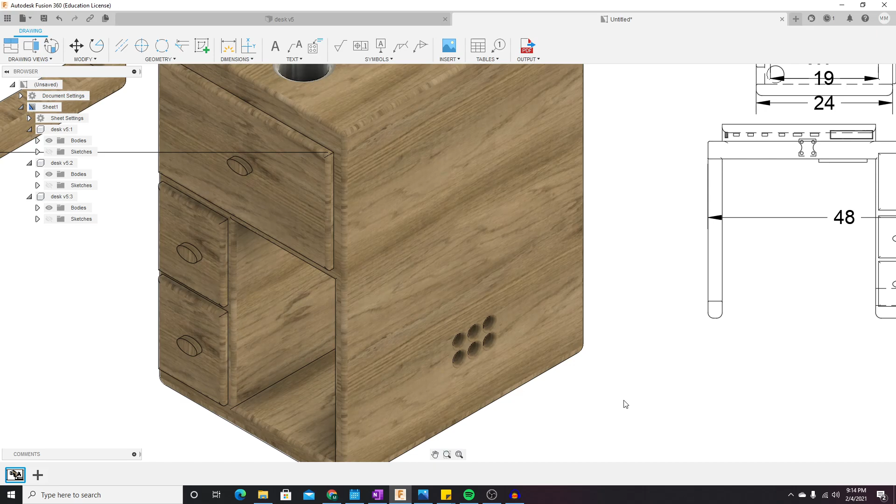To start off, we're going to either press Ctrl N or File on the top left and create a new design. Of course, we covered zoom in, planes, extrusion, basic shapes, and all of that in the previous video, so if you didn't watch those, maybe go give them a watch.

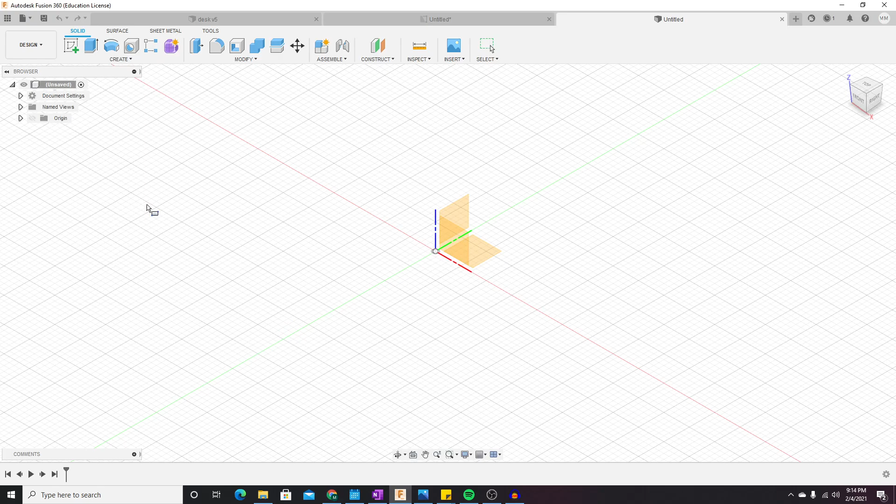We're going to start off by choosing a box. We'll pick the bottom plane. For the first option, since we're making an L, we can start off with the main body portion, and for today we're going to do 0.5 heights.

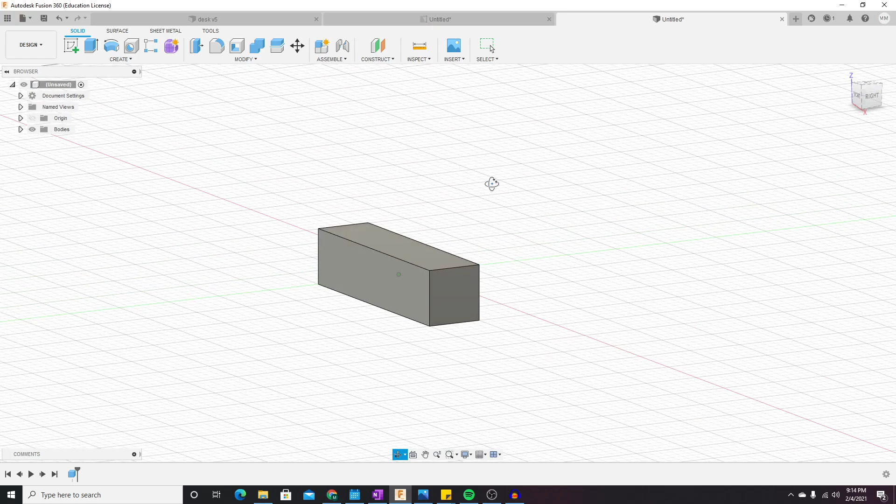When looking at this rectangle, in my head I see two different methods of making an L out of it. If this rectangle was slightly longer, we would be able to cut out a portion just to leave an L. Or since this is a bit skinny, we can choose this face.

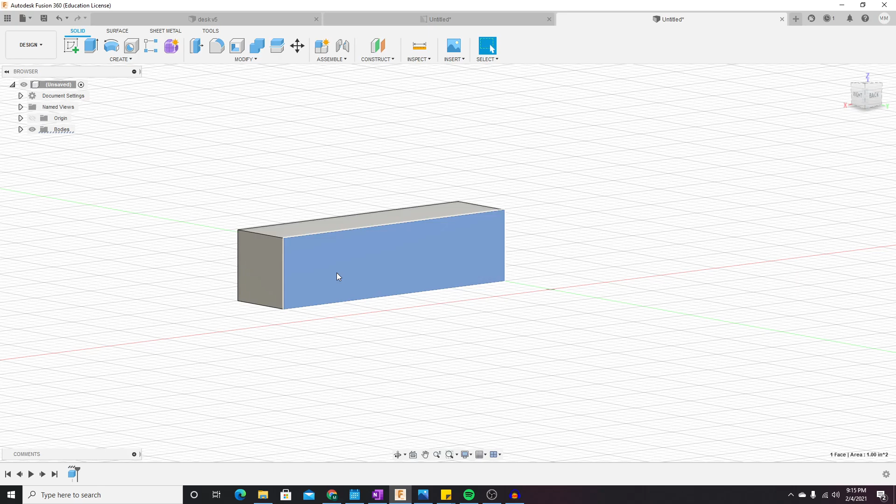The sketch option might be new to you. It's a very helpful option, much better than just freehand adding. So we can right click, press sketch, and now we're presented with measurements and this face.

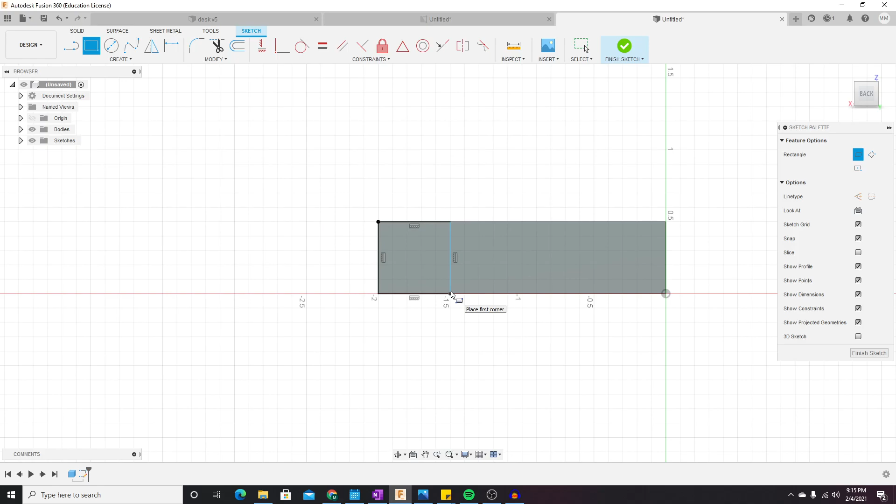For this case, we want to create the rest of the L, so we can press 2-point rectangle. There's obviously many more options: circles, freehand, mirrors, all of that. So we're going to click from here to here, finish sketch, and now we have a box right here, just from that very basic sketch.

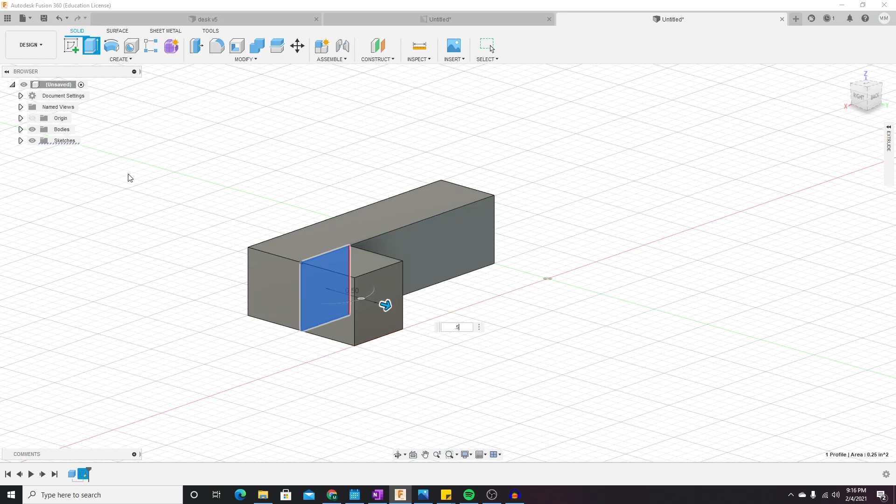A sketch tool is one of the most powerful tools. We can select this face and press E to extrude, or use the extrude option available here. We can press E, do 0.5 inch outwards, and enter. Now when we look, we've created a very basic and simple L.

Another method would be to create a wide rectangle, the width from here to here, create another rectangle on top, and just cut it out. I prefer the second method I'm about to show you because it's much faster.

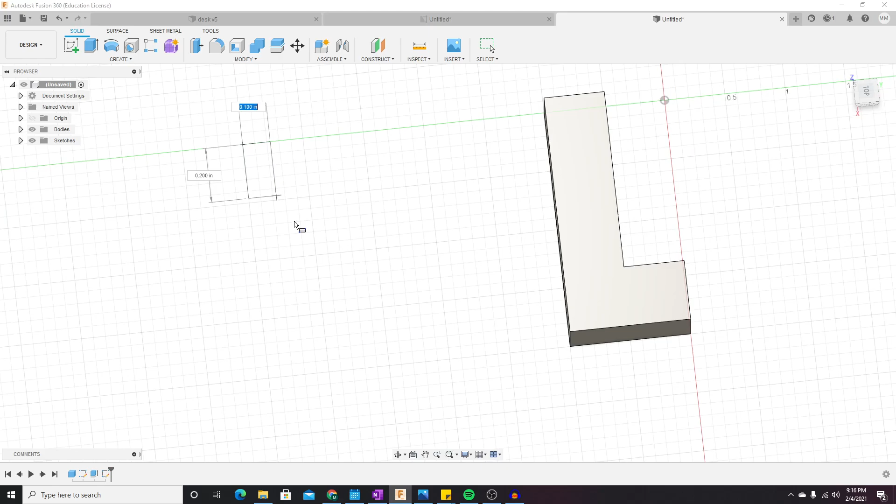So we can select the box, select our plane, the bottom plane. We're going to go to 0.5. So now this width is identical to this width.

All we have to do is select the top face, right click, create a sketch. Now we're looking at it sideways. Of course, you can change your...

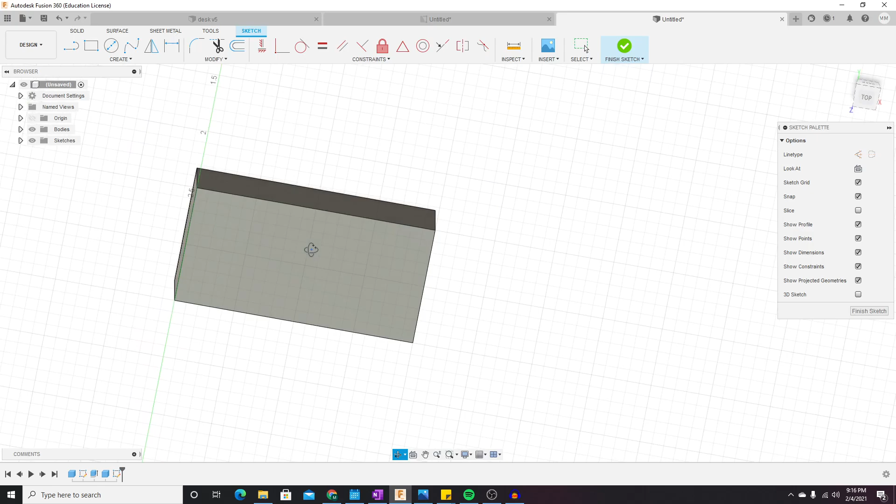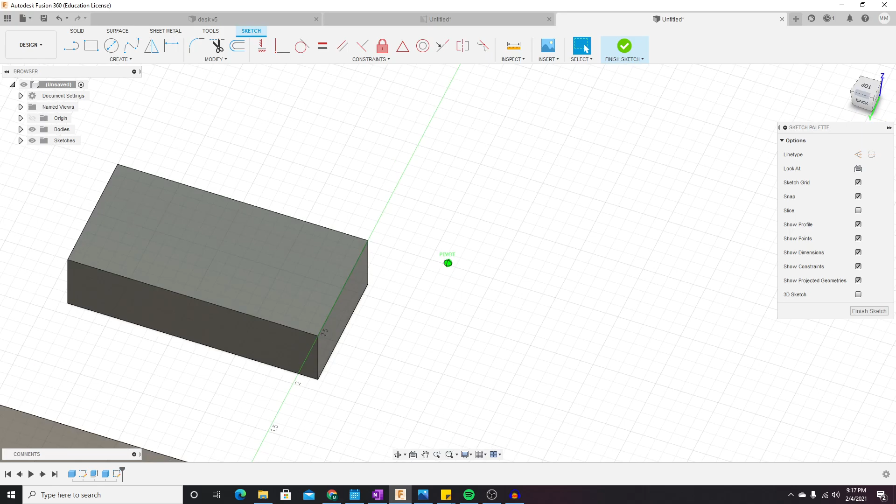Whoa. My apologies. Now I'm looking at it backwards. Of course, you could change your view. Whoa, completely lost. Alright, one way to help when you lose it is to select the face, or attempt to use your cube, so it's much easier to get back. So it seems like I reversed it. So if we go upwards and back, one second, and we are back.

So if you ever lose your positioning, just like I did, this cube in the top right is very helpful. Or you can press Ctrl Z or use these arrows to undo your last step and bring you back.

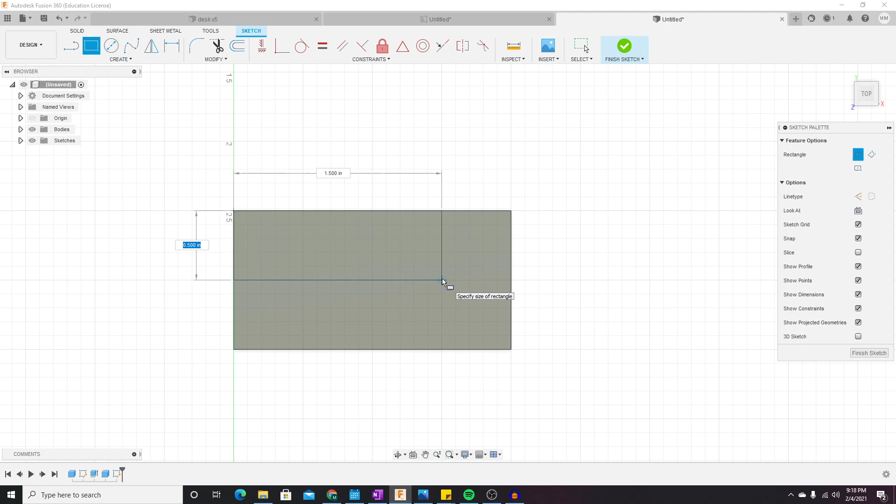To where you were. So as we were saying, we can right click and create a sketch. We can create a box from here to here, press finish sketch. This is the same basic principle as creating a hole. If you extrude onto another block and it shows red, that means it's taking away that part. So in this case, we're going to press right click, E, extrude.

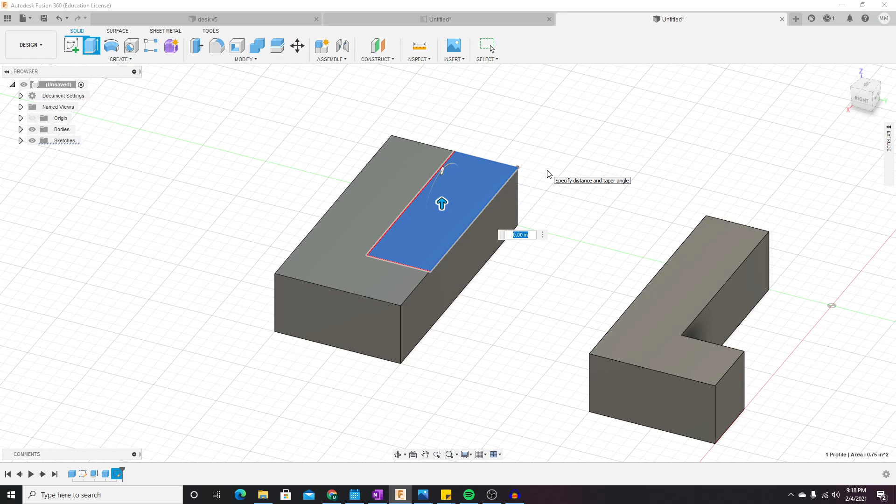Or use the option in the top left. Since the up arrow is facing upwards, we'll have to do negatives to go down. The width was 0.5, so we can do negative 0.5, enter, and it eats out. This was much easier than trying to strategically place a rectangle and extrude outwards.

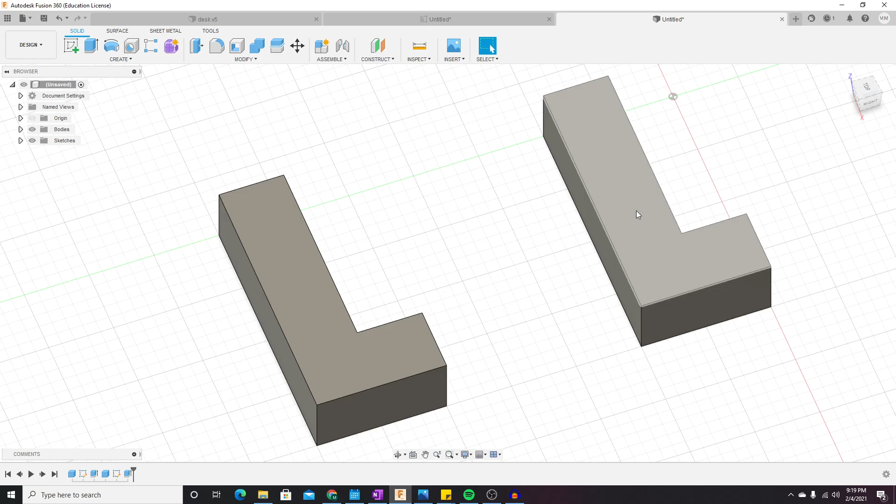In this case, we can start with the block itself and cut out from it. These two methods are essential in building projects. I hope you found this tutorial helpful, and stay tuned for the next tutorial, which should give you an even more advanced look at different objects. Thank you.